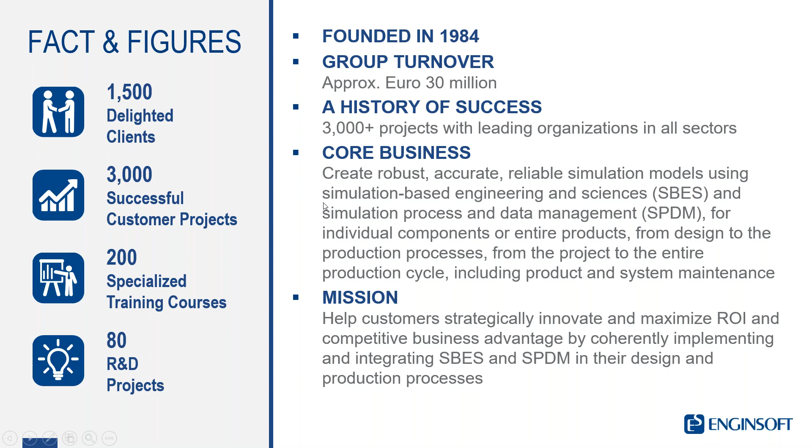We are present in Italy, where we have 6 offices, in the United States, in Virginia, and then we have 5 other EnginSoft offices around Europe, in France, United Kingdom, Germany, Turkey, and northern Europe in Sweden. But we have also close partnerships with synergetic companies located around the world in Portugal, Brazil, Japan, Korea, and so on.

modeFRONTIER is an integration platform with seamless coupling with third-party engineering tools. It means CAE and CAD tools, but also Excel, MATLAB, in-house code, and it is a complete solution for process automation and optimization in the engineering design process.

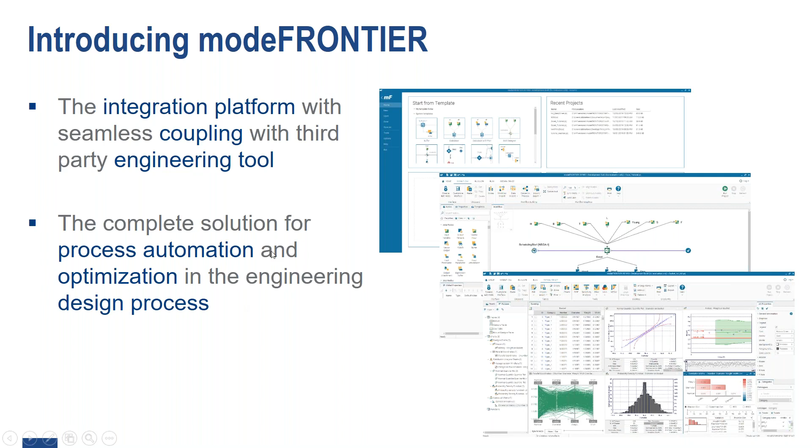I don't want to take more time and spend more words about technologies, but I want to introduce the next speaker. The next speaker is Francesco Perticaroli. Francesco Perticaroli is a mechanical engineer and an FE senior analyst at AristonThermo Group. Francesco will present us the business case of today.

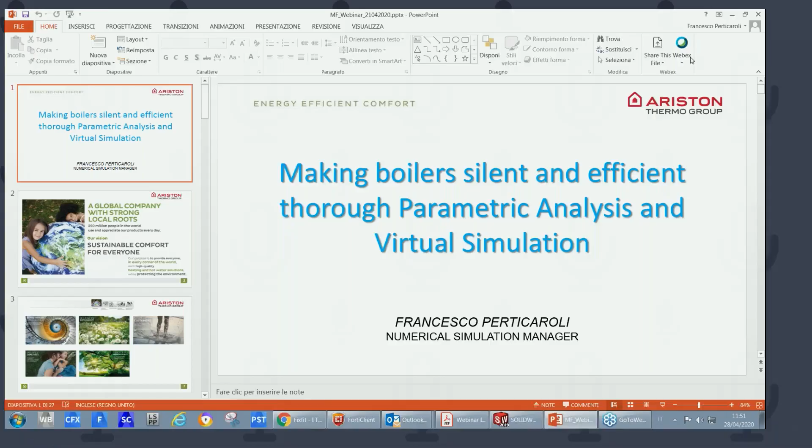Share my screen. Okay. Can you see my screen? Yeah. Okay. Excellent. Thanks, Francesco. And obviously, my name is Francesco, just to help you remember the name.

So actually, I work for AristonThermo Group, in Osimo, which is in the central part of Italy, and I'm in charge of the simulation team. I'm the simulation team manager. What I'm going to present to you is an exercise using virtual simulation to find out the optimal design using parametric analysis by modeFRONTIER.

Obviously, the presentation starts with a couple of slides regarding our company. AristonThermo Group is a global company. It's spread out around the world. That's the figure about the number of people in the world that use and appreciate our products.

And the mission, or vision if you prefer, is sustainable comfort for everyone. It's not just to give comfort to everyone, but to make comfort accessible for everyone and respect the environment. Those are the two main points that we are following this year and in the years past.

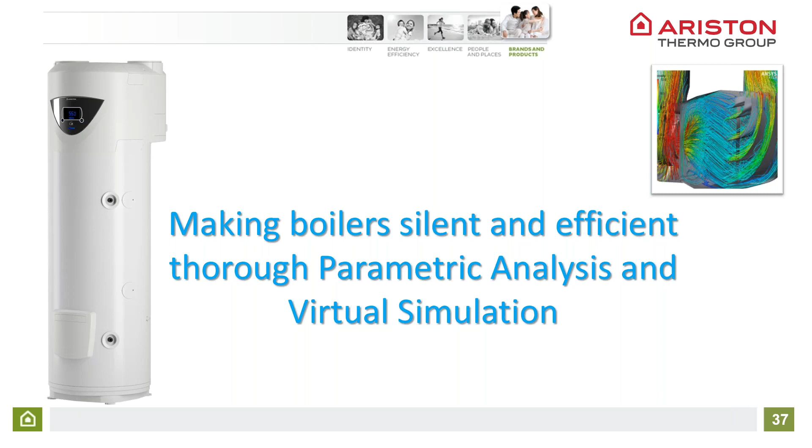Why is it important to have the system really silent, or to drop the noise value? Because the vast majority of the time we have a chance to set up this device in the garage, for instance, or in the technical room. But sometimes it's not possible. You can see the picture, and you have the system close to the bedroom, or the living room, or the kitchen, and you have really nasty noise that comes out in the living room when you have dinner. That would not be so good for the customers.

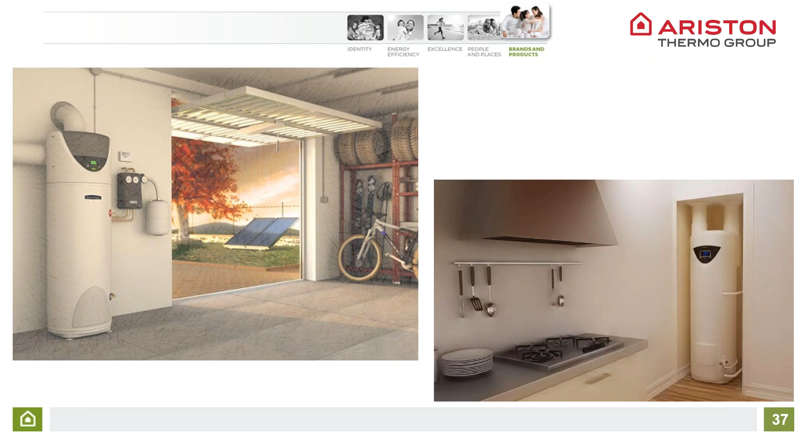That's the reason why we came out with the idea to drop the level of noise, but in the meantime try to increase the performance of the system. The heat pump is just a system using a thermodynamic cycle approach. So we have expansion valve, compressor, evaporator, and condenser. And we have those two parameters set up at the bottom of the system, and the condenser is just a pipe wrapped around the boiler.

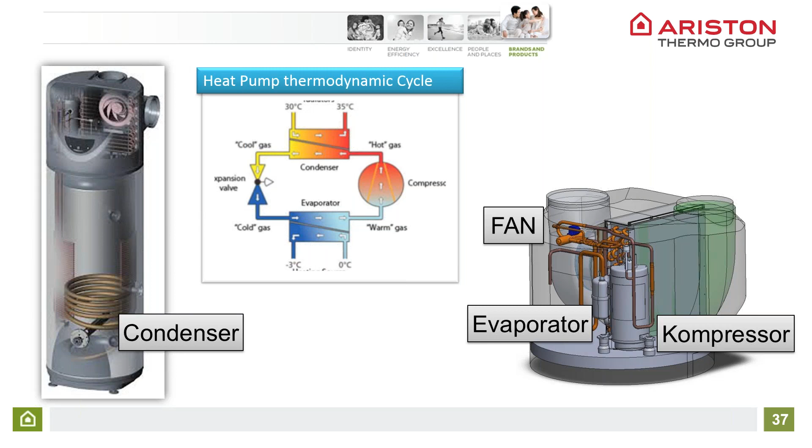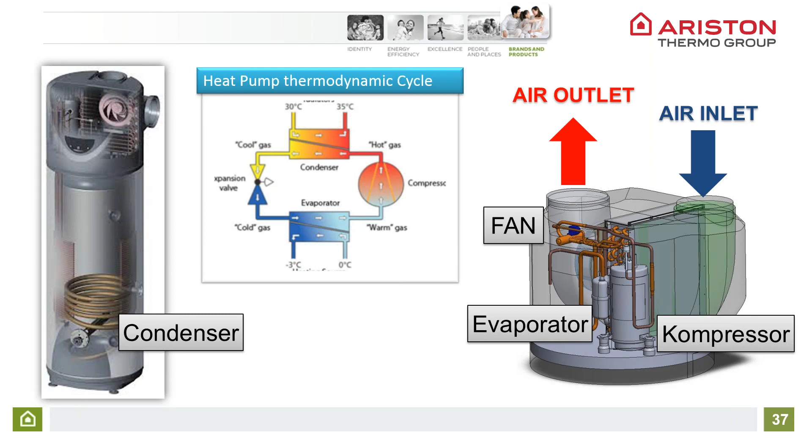The condenser is separated from the boiler with hot water from the regulation point of view, but it has the same effect as a real condenser in the normal heat pump water heater. So actually, the air goes into the system at the inlet, through the evaporators, and is taken out by the fan. And that's the overview of how the heat pump water heater works.

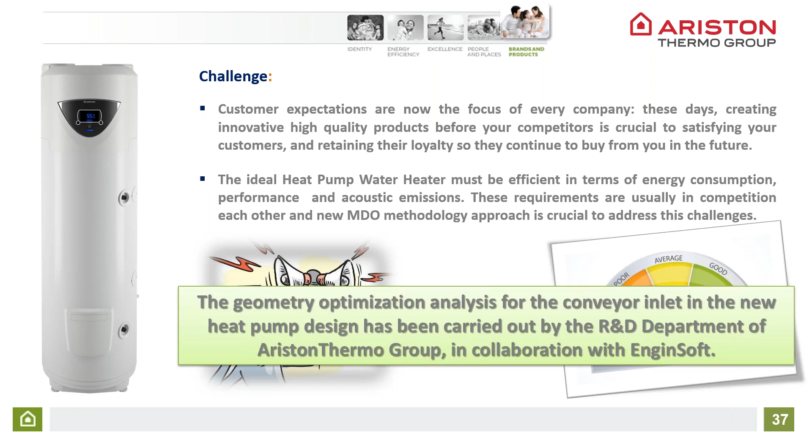So the challenge is to reduce the noise and increase performance. And that's why we came out with a collaboration with EnginSoft. They really helped us to perform this activity. Try to define an optimized geometry, particularly the conveyor inlet, to spread the fluid in the evaporators much more uniformly and try to reduce the turbulence and consequently reduce noise. In the meantime, try to increase the performance of the products.

Just to describe it to you in pictures, which are easy to understand. If you go into the system, as you can see here, let me just use the, there we go. So the air goes into the system, goes through the evaporators and is taken out by the fan. And that's the speed profile. You can see here it is really, really unbalanced. And that's confirmed by the testing.

And that means if you have unbalanced behavior, you don't have a chance to work the components at 100% of their capabilities. That means the performance is low, and chances are that you have turbulence phenomena which come out due to the fact that you do not have a completely homogeneous system, and consequently that turbulence can create noise.

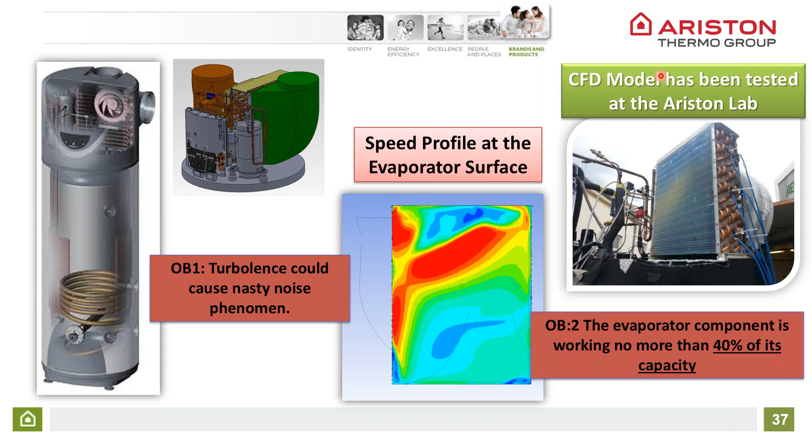So actually we have two main objectives. Try to increase the performance of the evaporators, by spreading the fluid homogeneously at the inlet of the evaporators, and in the meantime reduce the cause of the nasty noise phenomenon, which is turbulence.

Actually, we have the necessity to represent these pictures, with really nice colors, with a number which helps us find out whether one solution is better than the others. And we use the standard deviation compared to the ideal distribution. Standard deviation helps us have two different indicators. The first one is how far we are compared to the ideal distribution, and the second one, what would be the spread of the velocity.

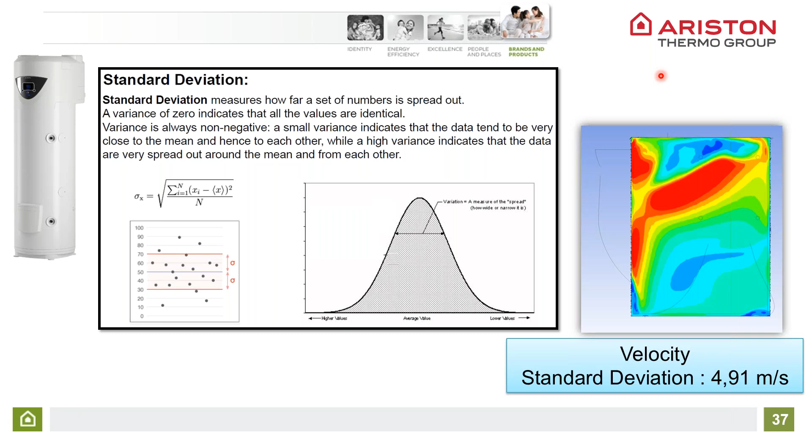We tried to find out when we realized that we cannot have a chance to spread out fluid in this configuration, and we need an additional device to help us with that. Then we came out with the fins system, set up into the conveyor inlet. We noticed that when we increase the number of fins, we have a chance to spread out the fluids and the standard deviation fairly drops off. We reach the maximum construction numbers possible, which is number 5.

More than 5 is not possible from the construction point of view, or construction limit. For that system, we set up the standard deviation value at 3.87, which is an enormous reduction compared to the current design or the original design.

And the question was, okay, we set up what we thought would be the best positions, but the question was, is that the maximum one? We cannot drop off the value further, or is that the best one you can reach?

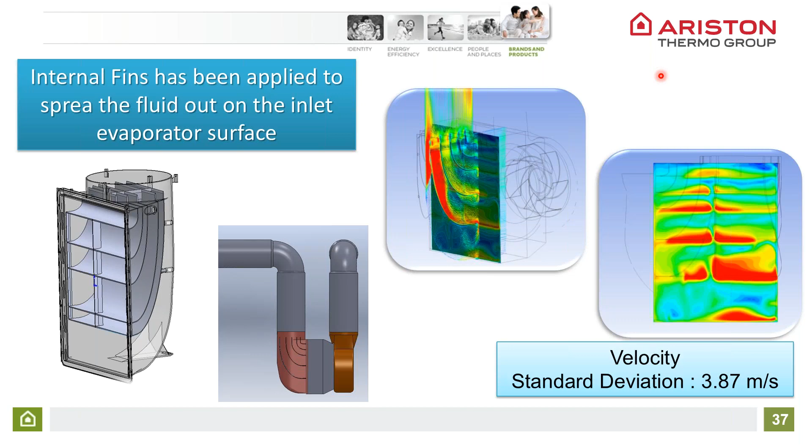That's the reason why we came out with a structured DOE analysis and automatic workflow by modeFRONTIER. The reason is quite simple to understand, because if you see the left side of the pictures, in the input parameters we have 10 different inputs and 7 outputs. If you do it manually, without structured DOE analysis or really strict procedures, you don't have a chance to collect the correct results. modeFRONTIER makes it possible to drive you in a quite straightforward manner to define the DOE analysis, and in the meantime find out what would be the theoretical best in that design space you have to define beforehand.

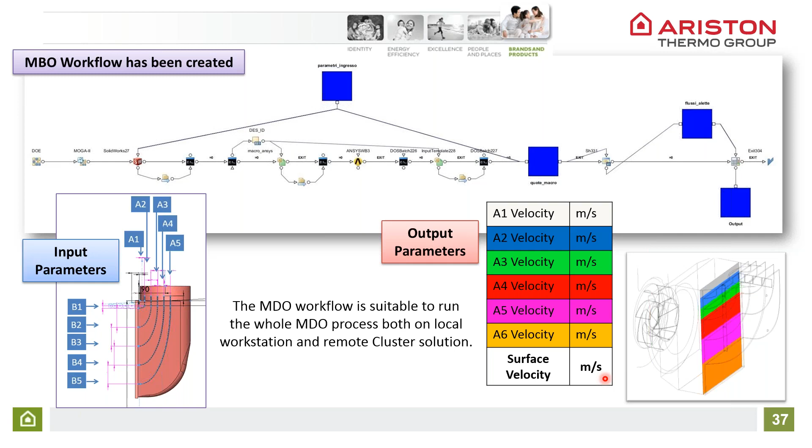If you think about the system, you can move 10 different inputs and 7 outputs, and 2 main objectives: noise reduction, and in the meantime spreading out fluids in the evaporators uniformly.

Just to recap here: we use 10 different inputs, 7 outputs. We use the clip positions to have the chance to modulate the area in an automatic manner, particularly when we have the narrow area, the ISOCLIP follows the position of the fins - that means the area is bigger. We have one objective, minimize delta, and 2 geometrical constraints. The fins can move independently, and we have just 2 geometrical constraints.

We create a sort of script to make optimization meshing easily, and also the mesh and results creation. We create automatic DOE, and particularly we use - this is really important - the response surface method approach, and genetic methods, genetic algorithm in modeFRONTIER to run the virtual simulation. That's really powerful, and I can show you the benefits in a couple of slides ahead.

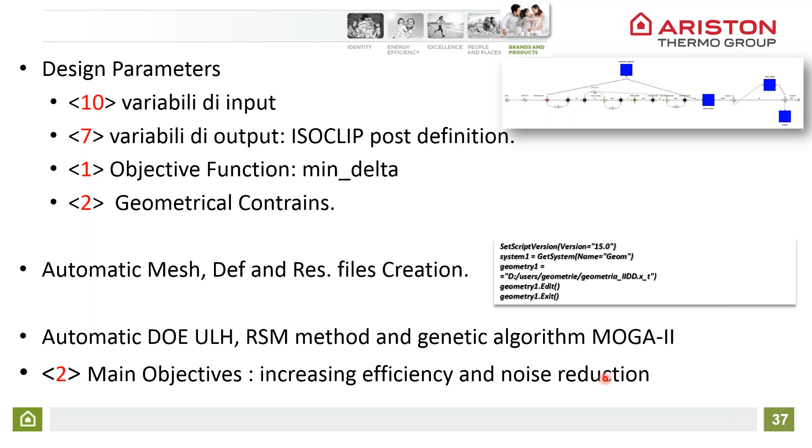So the 2 main objectives: increase efficiency, reduce noise.

One of the benefits that modeFRONTIER offers for this application is trying to find out not only which is the best theoretical design point, but what would be the effect of single variables on the final results. For instance, you can see in the slides the red graph, and that means that variable has much more influence compared to the purple one on the final results. So bigger changes for that variable means bigger changes in the final results, and on the other side, small changes for that variable means no effect on the final results. You can see here in numbers, in a straightforward read, how important single variables are compared to the final results.

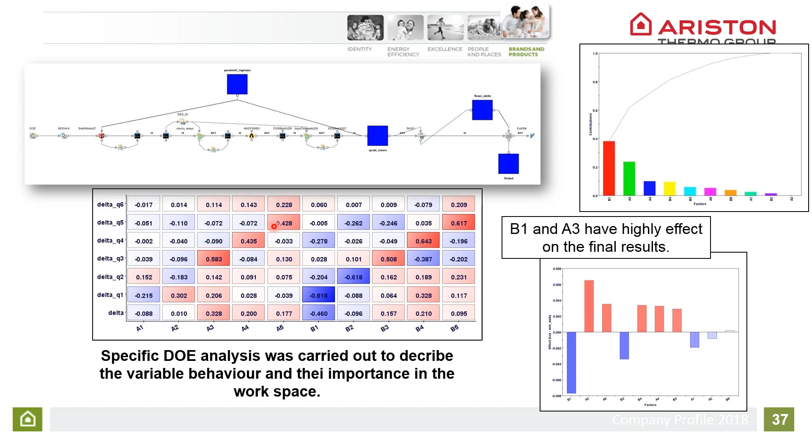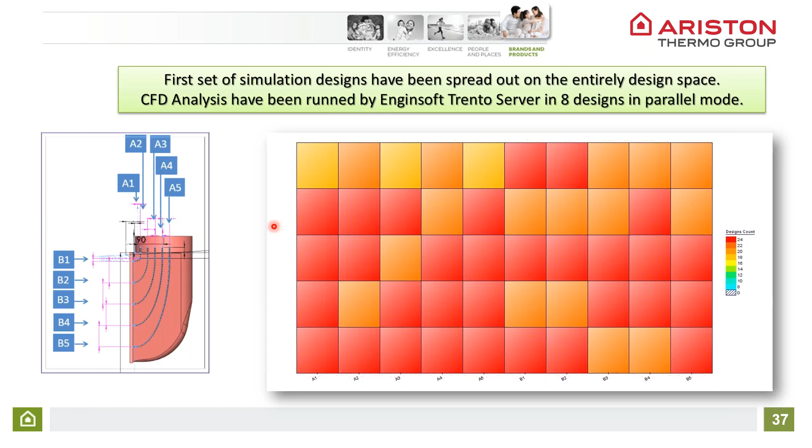Finally, when we have all that done in terms of spreading out the correct design to define the correct design space, we use the response surface method generation and run 10,000 simulations automatically in a few seconds using the response surface method plus modeFRONTIER genetic algorithm. This is really important because we have a chance to explore an enormous number of simulations without carrying them out physically, just to collect an idea about what the trend will be.

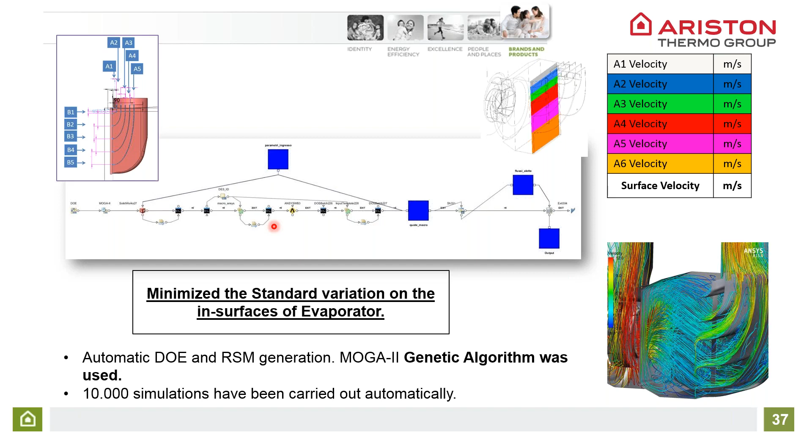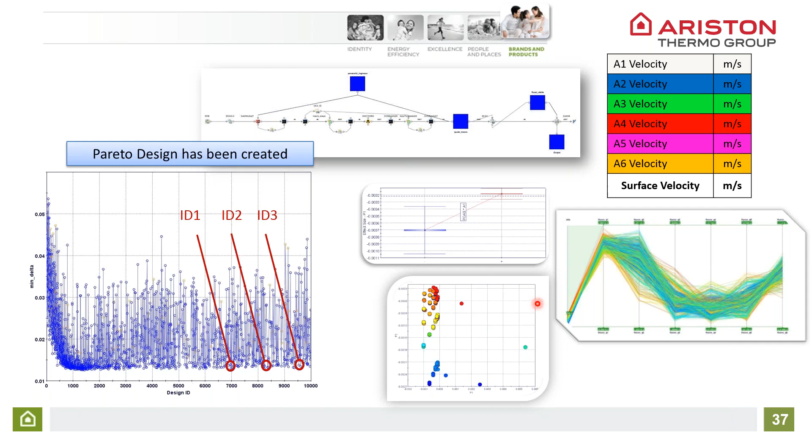At the end of it, we come out with the post-processing. You could have just an example there, but the main important thing is we have the chance to define the Pareto frontiers, and there we come out with the 3 best designs we thought were the best. You can see here a couple of slides, and we run and collect the setup because they're virtual, and we run in the CFD mode, and we notice what is virtual was really close to what is in the simulation. When you use virtual, that means design carried out by the response surface method approach.

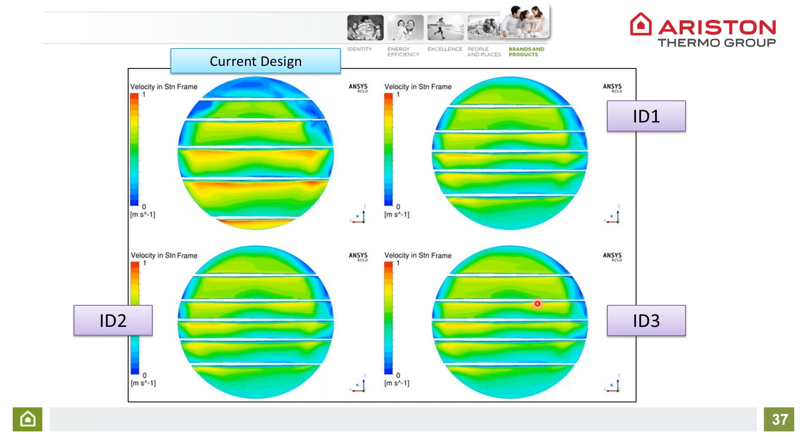And the result in the CFD simulation you can see here compared to the current design, so the original fin position means an enormous homogeneous velocity distribution, and that's a cross section, highly reducing the turbulence, particularly at the inlet. The second one is you have a chance to spread out the velocity of the evaporator in a really clever manner, much better than before.

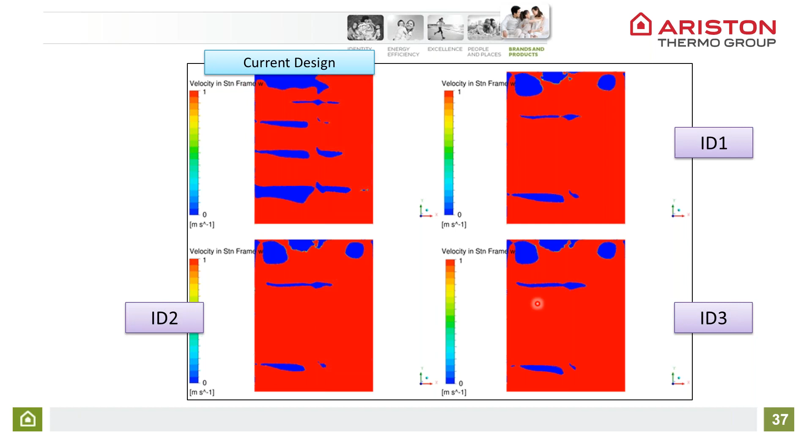If you want to translate these color pictures into figures, that means the standard deviation is now 2.61 meters per second. We started with 4.91, dropped to 3.87, and after this optimization we reduced it really high to 2.6. That means really homogeneous compared to the position at the beginning.

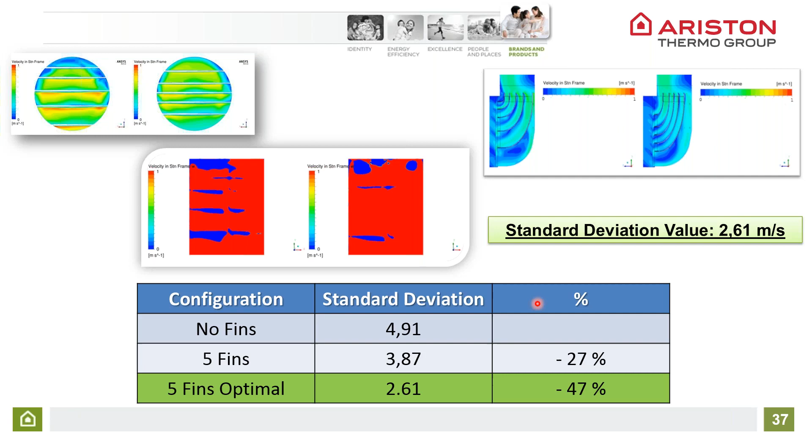Just to summarize the advantages of this combination of simulation and modeFRONTIER approach: first, this component now works at roughly 60% to 70% of its capability, and the standard deviation drops off by roughly 47%, which means increased efficiency and uniformity for the evaporator flow distribution. The main important thing was trying to reduce the noise, and we dropped off 3 dB, which is an enormous value, and that's high performance noise reduction, setting this product as a leader in the HPWH market.

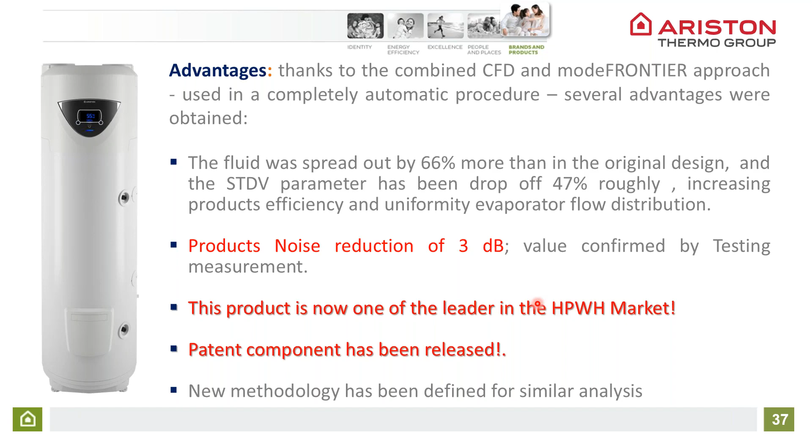This component or idea is covered by patent. That's really important for innovations and contributions regarding simulations and the combination of virtual simulation with the modeFRONTIER approach. Last but not least, a new methodology has been defined for similar analysis. This is just an example, but you have a chance to perform a combination of modeFRONTIER and virtual simulation for all that kind of stuff. You can use the same approach with the same potential and results.

Thanks to modeFRONTIER, 10,000 simulations are performed automatically. The fluid in the conveying inlet, particularly at the beginning of the inlet to the evaporator, is now well distributed, and we have an enormous time reduction when using the modeFRONTIER simulation tool compared to normal standard procedures.

Usually for a single run, we have internal infrastructure that needs a couple of days to run a single CFD simulation. That means we would need to spend 220-plus days to simulate the design. These activities have actually been carried out in 20 days, so it's not comparable. We have advantages in terms of performance, noise reduction of these products, and enormous time reduction.

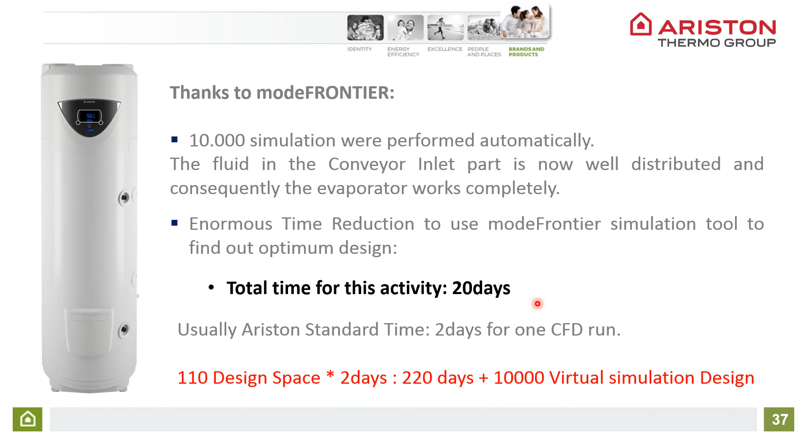Hope you enjoyed that presentation. Thanks a lot for your attention. If you have any questions, I'm really available for you.